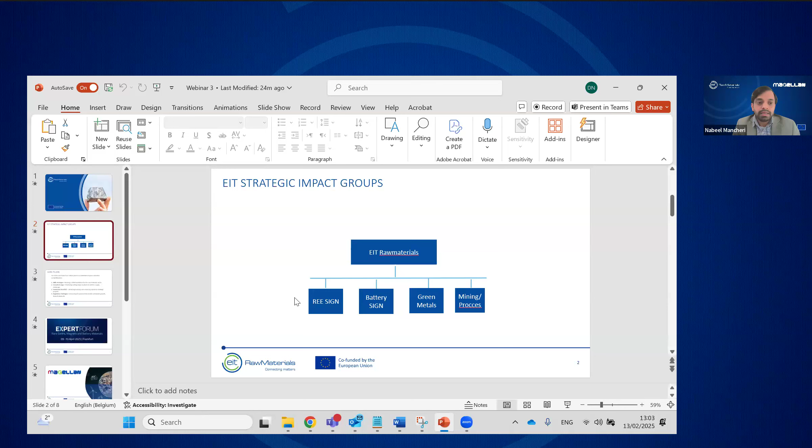But before I go to the webinar topic, I want to introduce you to something new that EIT is launching, which is very relevant to our sector, especially rare earths and magnets. EIT is going to soon launch four strategic impact groups, or networks, on rare earths and magnets, battery materials, green metals, and mining and processing technologies. These four strategic groups will tackle four critical pillars to accelerate European industrial competitiveness in sectors like skill shortage, innovation gap, investment shortfalls, and regulatory challenges.

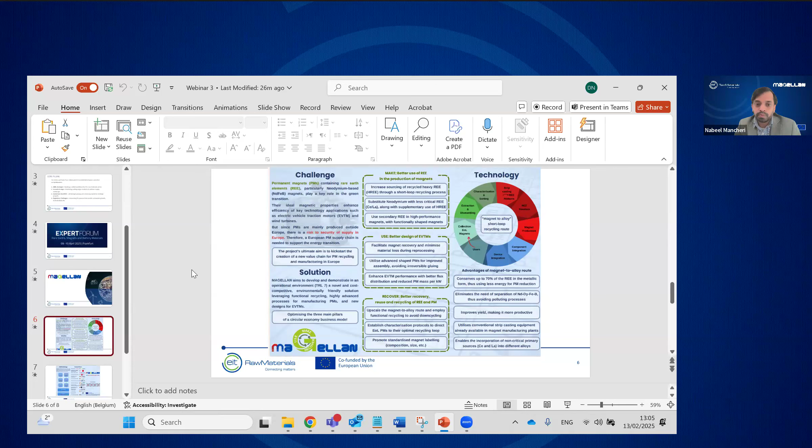Now I go to Magellan. Magellan is a European Horizon 2020 project coordinated by Orano, a well-known company in the rare earth field. The project's ultimate aim is to kickstart the creation of a new value chain for permanent magnet recycling and manufacturing in Europe. The solution is that Magellan aims to develop and demonstrate, in an operational environment at TRL 7, a novel, cost-competitive, environment-friendly solution leveraging functional recycling and highly advanced processes for manufacturing permanent magnets, as well as new designs for EV motors. Different work packages look into the whole value chain, with specific members looking at each part.

We have 14 consortium members from all over Europe, led by Orano, with EIT Raw Materials, CEA, and magnet companies like Magnet-T also part of the consortium.

This webinar is part of a series; we had the first and second ones in previous months, where we looked at different aspects of recycling permanent magnet issues. This webinar is also about recycling, but we will closely look at the economic and technological challenges, and also at what we usually call the short loop and long loop process routes for recycling permanent magnets.

So I have experts from companies well known in the industry and in our sector, and they will provide an update and discuss the issues.

The first speaker is Sorana Luca. She is from CEA, working on the Magellan project itself. She has several years of experience in the industry in the field of material science, synthesis, characterization, magnetic materials, semiconductors, and ceramics, etc. She did her PhD in material science in 2022 in France, in Grenoble. Her area of expertise includes experimental synthesis and characterization of rare earth intermetallic alloys and compounds, as well as recycling technologies by powder metallurgy.

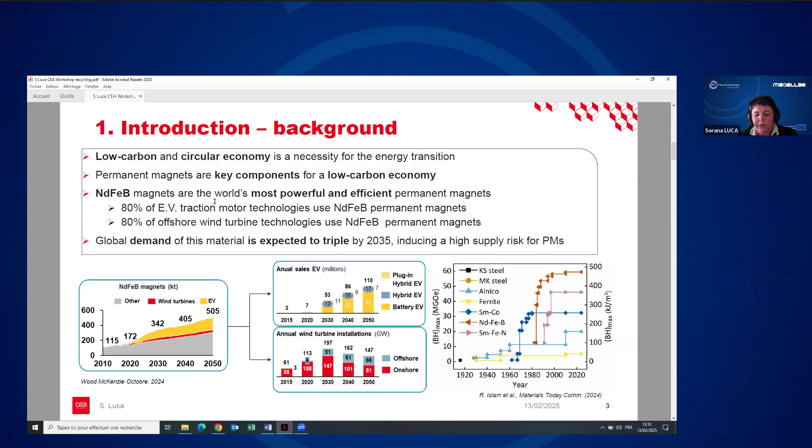Europe considers its external dependence on permanent magnets as critical because China dominates the entire value chain of permanent magnets, from the ores, the mineral extraction, the separation of the different rare earths, the metal conversion, the manufacturing of the alloys for permanent magnets, and manufacturing of the permanent magnets. Meantime, Europe imports almost all its needs in permanent magnets from China.

So a smart circular economy can meet the resilience challenges of the European energy transition. And we all know that permanent magnets are recyclable, and the recycling of this material becomes strategic.

There are several recycling strategies. We can recycle these magnets by a very short loop, if I can say, the direct reuse, which is the most energy efficient strategy for the recycling. But the system where the magnets will be reused should be compatible with the end-of-life magnets, and also we have to properly extract them from the end-of-life system.

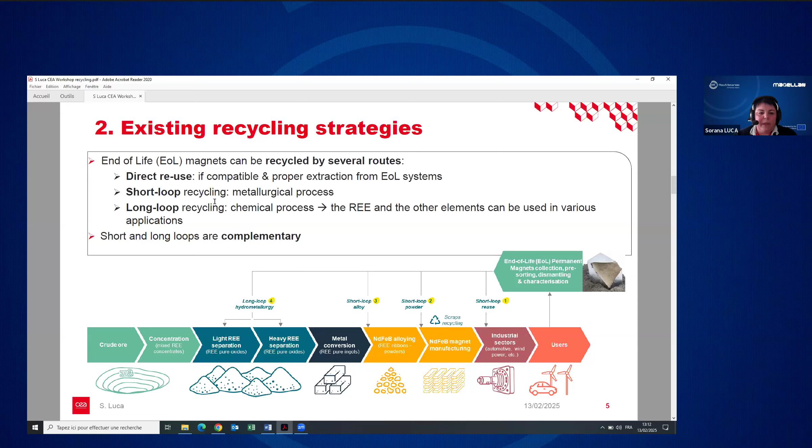In this context, we launch a research and development program together with Orano, which aims to industrialize and manufacture recycled permanent magnets, high performance magnets, which incorporate at least 25% of secondary raw materials in a short loop process.

The magnet recycling industry can capture growth opportunities in this strategic segment because the stock of used permanent magnets is building up with significant volume from the first series of clean technologies. And Europe recognizes the strategic nature of permanent magnets recycling within the Critical Raw Materials Act.

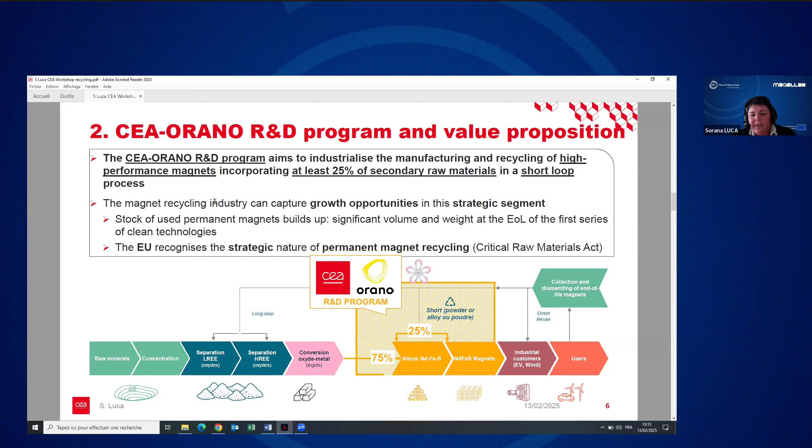Concerning the short loop recycling processes, scrap magnets can be introduced at different steps of the manufacturing of the magnets. High performance permanent magnets are manufactured by the conventional powder metallurgy route, which means that we fabricate an alloy by strip casting. This alloy is pulverized, the powder is compacted, then densified by sintering. An annealing heat treatment is applied to enhance the magnetic performances.

Then magnets are machined, coated, and included in a system where generally we magnetize the magnet. In the short loop recycling process, we introduce the scrap magnets at different steps. In the melting route, or magnet to alloy, the scrap magnets are introduced in the casting and alloying of the material, and in the powder route, we introduce the scrap magnets in the pulverization of the material.

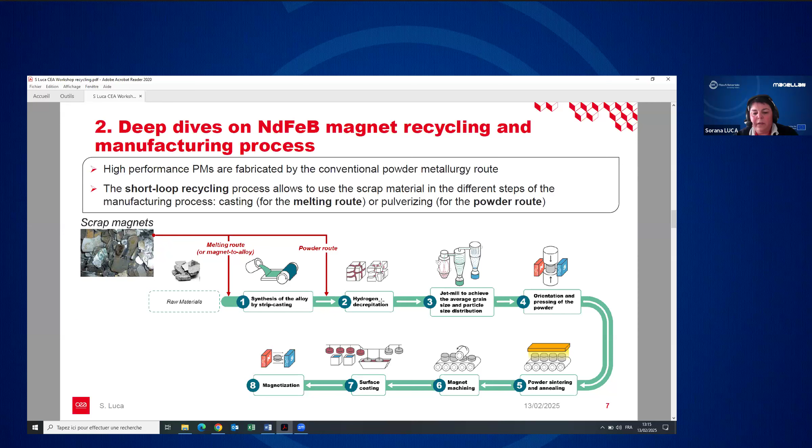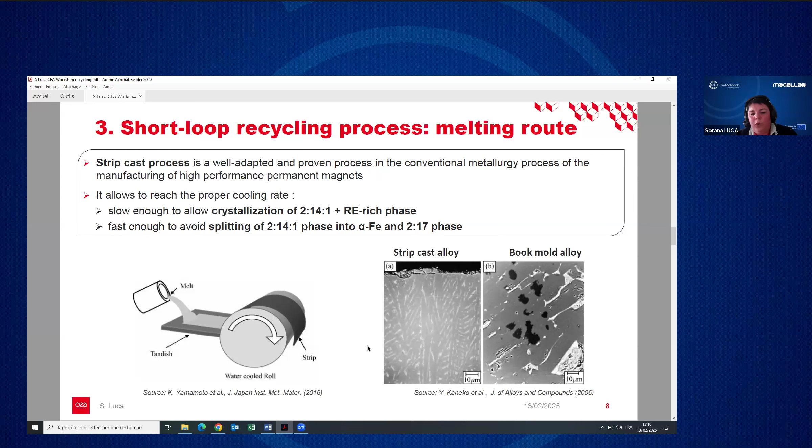Concerning the melting route, it is performed by strip cast process. The strip cast process is a well-adapted and proven technology in the conventional metallurgy process of manufacturing neodymium iron boron high-performance magnets. The raw material is induction melted. The melted alloy is poured on a copper water-cooled rotating wheel, and an alloy under the form of flakes of several hundred micrometers is obtained. These flakes have a particular microstructure which is very well adapted for the subsequent steps of the manufacturing process. Only the strip cast process allows us to obtain this particular microstructure.

So in the melting route, the scrap magnets can be used as raw materials to fabricate alloys and subsequently magnets. This route is particularly interesting in the case of heterogeneous batches of end-of-life magnets, especially those highly contaminated in oxygen and carbon, and allows us to avoid the conversion oxide to metal process. However, homogeneous batches highly contaminated in oxygen can also be recycled by this route. So this process is versatile.

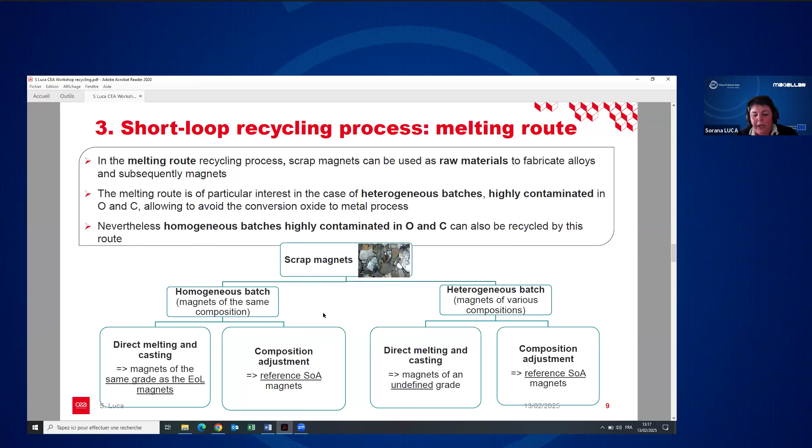Two kinds of scenarios can be seen and used for this recycling process, and I will show you later some examples of magnets recycled by these routes. Here you can see some pictures of the strip cast equipment which is installed in CEA-LITEN, which enables us to fabricate batches between 10 to 50 kilograms of alloy. Here we have the copper rotating roll, and here you can see the melted alloy which is poured on this copper rotating roll.

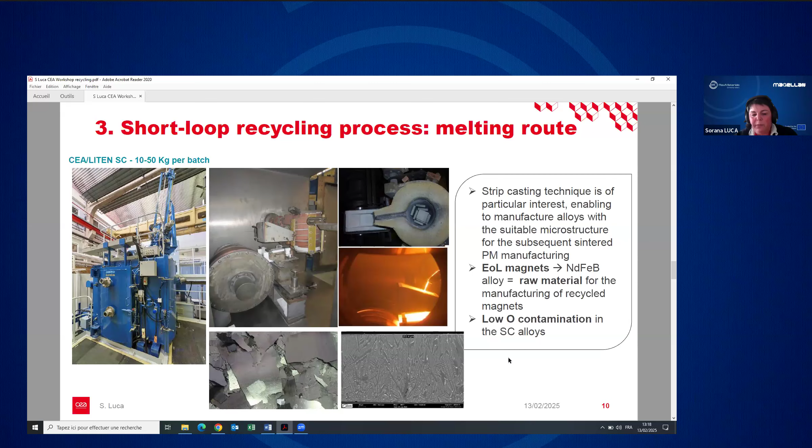You can see in this picture an example of recycled alloy in the form of flakes, with the particular microstructure formed by magnetic dendrites of the magnetic phase separated by a very thin rare earth rich phase. This particular microstructure is very useful for the next step of manufacturing by the powder metallurgy route of the magnets.

Here are some examples of recycled magnets, results obtained within different projects. In the first case, a homogeneous batch of end-of-life magnets coming from wind turbines was used to fabricate alloys and then magnets. We can see a very good recovery of the magnetic performances of the starting material, using only end-of-life magnets as the starting material. This project was financed by EIT Climate-KIC.

Another example is a heterogeneous batch of end-of-life magnets, where by a composition adjustment we can meet the reference N38 state-of-the-art material. These results were also obtained within an EIT Raw Materials financed project. What I did not say in the first case is that at the time of the project, the yield of the process was about 50%, but we have to know that oxidized material can enter a long loop recycling process.

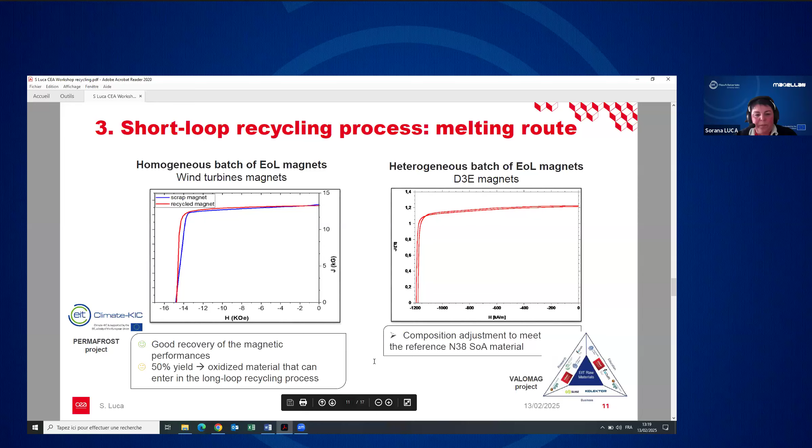The Magellan project, a Horizon Europe project, aims at developing and demonstrating in an operational environment a functional recycling route for permanent magnets, which feeds into the melting route for the recycling of permanent magnets. The recycled magnets are designed to meet the specification for electric vehicle traction motors.

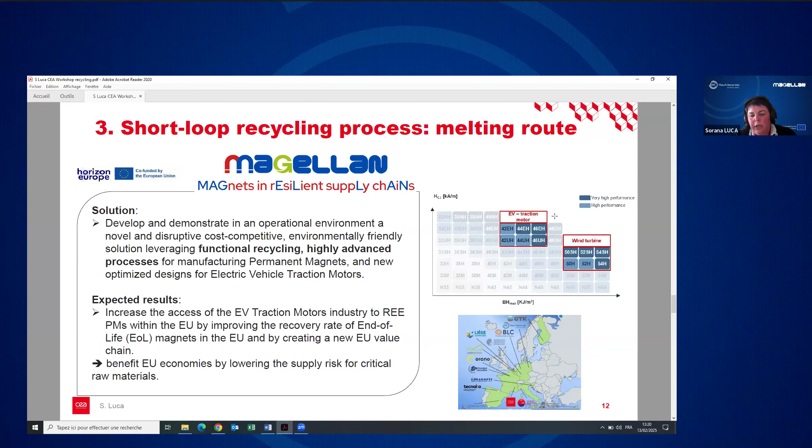If we talk now about the powder route, the scrap magnets will enter the step of pulverization during the conventional process to fabricate new magnets. The powder route is based on the reaction of neodymium iron boron alloy with hydrogen, and is particularly interesting from an environmental point of view.

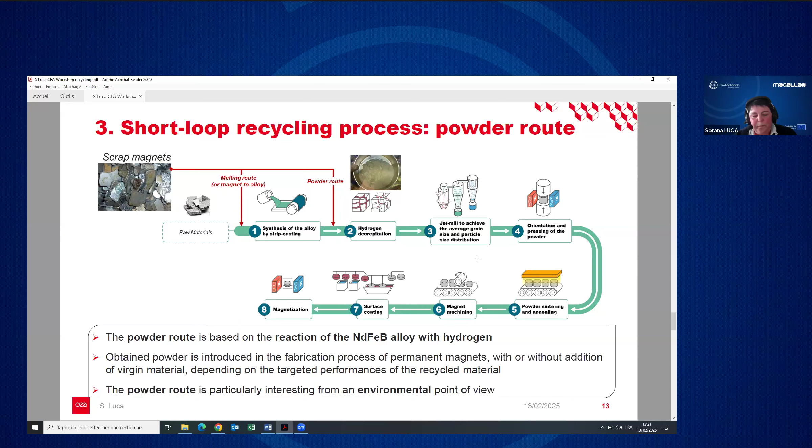The reaction of the neodymium iron boron alloy with hydrogen can be described here. We have scrap magnets with the microstructure of magnetic grains surrounded by non-magnetic rare earth rich phase. This alloy, these magnets, will react with hydrogen at ambient temperature, enabling pulverization of the material. This reaction is called hydrogen decrepitation.

These powders will have the same microstructure as the starting material. If we mill down this powder to fine grains, we can manufacture new magnets. Here are some examples of magnets manufactured with different loads of recycled powder, and we can see we obtain good magnetic properties by this process.

At higher temperature, under hydrogen above 600 degrees, the magnetic phase will disproportionate. However, this reaction is reversible, because under vacuum the neodymium, iron and iron boron will recombine to form submicronic grains inside a large particle. So this powder is coercive and can be used for bonded magnets. Here you can see the microstructure of a particle, with submicronic grains of neodymium-2-iron-14-boron inside.

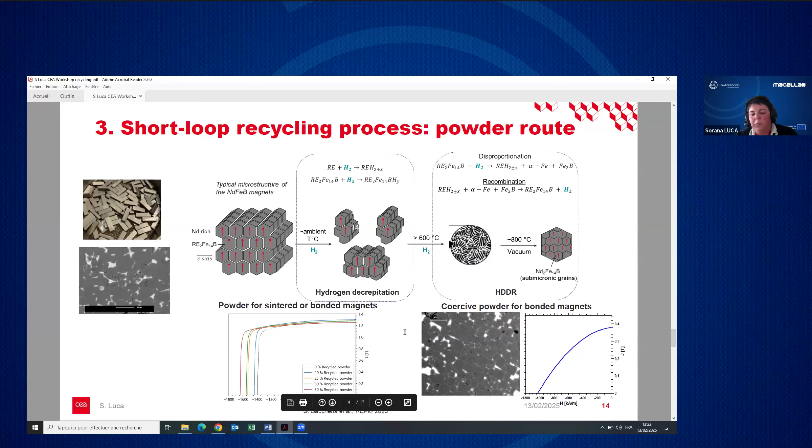In summary, the recycling of permanent magnets is possible, necessary, and strategic. The short loop and long loop recycling strategies are complementary, and each one is necessary. The short loop preserves value and strategic interests by producing magnets, and offers environmental benefits, reducing greenhouse gas emissions and water consumption.

I will finish my presentation by presenting our pilot line, which is under installation at CEA. This research and development program has a unique position to fabricate recycled magnets, which will incorporate at least 25% of secondary material from the short loop, with a target to meet the performances necessary for electric vehicles, so high performance magnets.

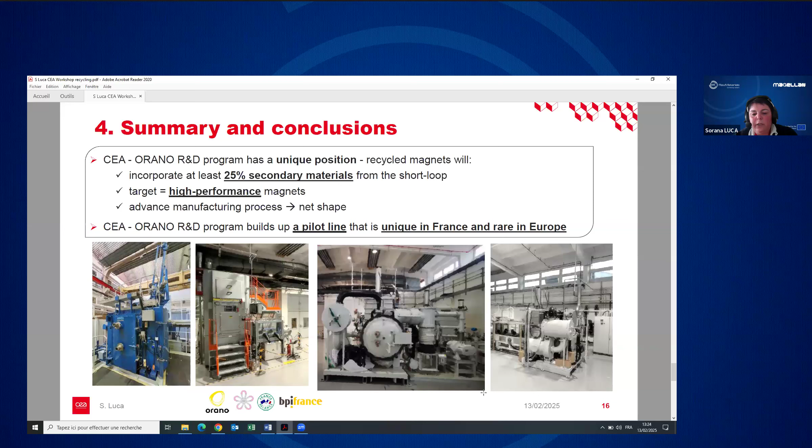We also work on advanced manufacturing processes to fabricate net shape magnets. This research program enabled us to build up the pilot line, which is unique in France and rare in Europe. Here are pictures of some equipment installed at CEA. Thank you for your attention.

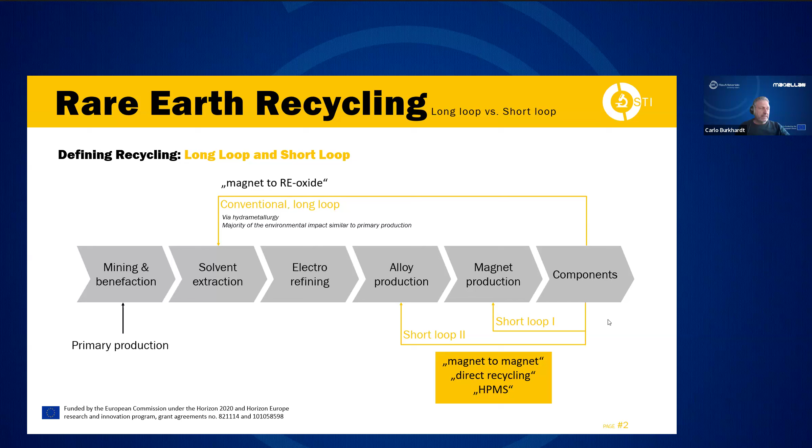I will look into the environmental aspect a bit later, and would like to start first with another topic, which I think is very important, because we just heard that recycling of magnets is possible. Yes, this is true. However, the recycling rate is still very low, and there are various reasons. First of all, end-of-life magnets are not all neodymium boron; the majority of it is ferrites.

There is also samarium cobalt, and even neodymium boron comes for recycling in two completely different states. One is polymer bonded, which is not so good to recycle - I'm not saying it's not possible, but it's probably commercially not very viable. And you have the sintered magnets, and of course that's for the moment the main target, how we can recycle sintered magnets.

So first of all, you have to distinguish what's in your component. And as I said, today we have no labeling, so it's quite difficult to find out what kind of magnets you have. I even had some recyclers that struggled, buying loudspeakers and thinking they have neodymium boron, and it was just ferrites, and they didn't make a profit out of it. The second big problem field is that currently we have no design for recycling - most of the magnets are deeply embedded, they're glued into the components.

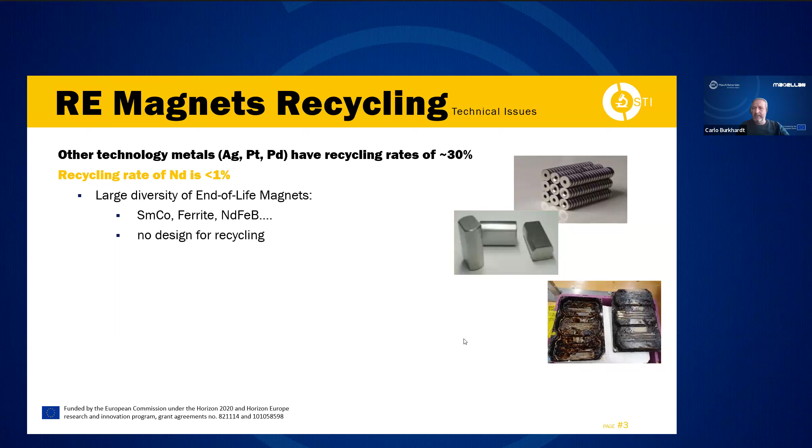They're coated with various coatings that are not so good for recycling. So that's a second problem field where one should look at. And the third one is that we have completely underdeveloped recycling schemes right now.

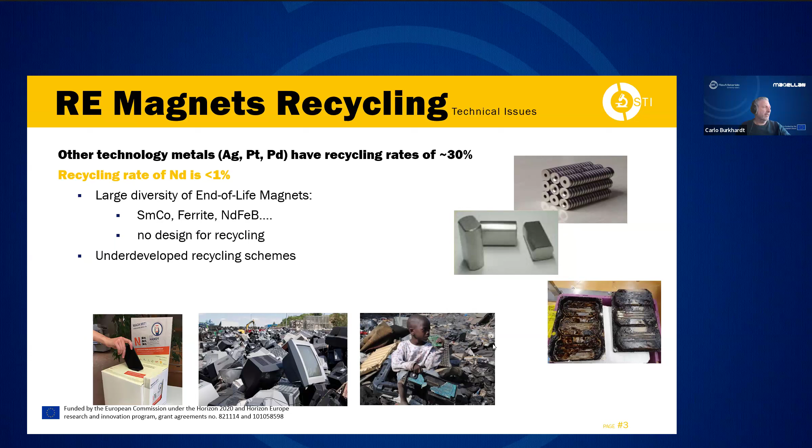There are a couple of placebo things, like you give back your smartphone. However, smartphone is probably one of the worst examples of how to recycle a magnet, because there are only a few grams in it, there are a lot of other materials in, but in the end, the material value is less than two euros. A lot of mixed scrap is ending in mixed deposits, and even a lot of it is exported. That's why I put this kind of provocative thing here.

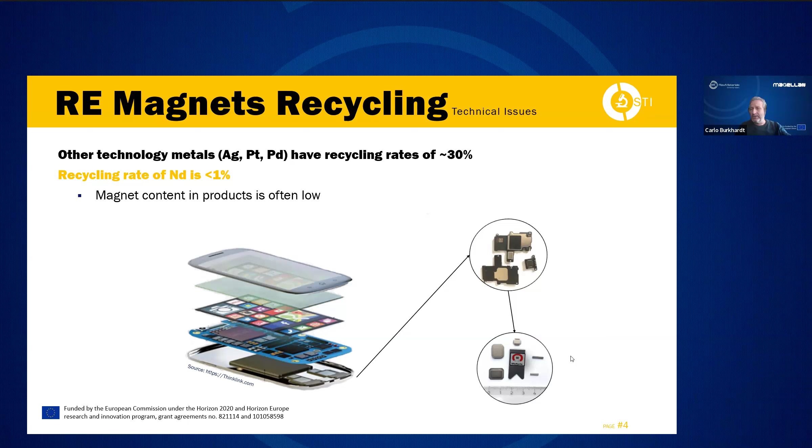As said already, the magnet content in the products is often very low. Neodymium boron magnets are fantastic because they have a high energy product because of their performance, but it means you need only very little in a lot of components. So in a smartphone, we're talking about 4 to 8 grams if it comes up to it, and very deeply embedded, so you wouldn't recycle a smartphone just because of that.

The next thing that's causing a lot of issues is that the current shredder processes, which are used for a lot of recycling operations, are not suitable for recycling neodymium boron under various aspects. First of all, the magnets agglomerate, and this is also hated by the recyclers because it leads to downtime and increased wear of the shredding plates. It's very difficult, if you look here on the left side on this hard disk drive scrap, to recycle something where the magnet is finely dispersed.

And obviously, because of their hardness, they're brittle, they're breaking and they're agglomerating. If you walk through recycling sites, you see a lot of spaces where a lot of magnetic scrap is agglomerated. Really, recyclers to date are not particularly fond of magnets.

This shredding procedure, of course, is changing, because in most cases where you have a neodymium iron boron magnet and the motor, you also have a battery pack. These battery packs don't like to be recycled because of the oxidation. They can combust instantaneously, and there are a lot of fires all over Europe in recycling sites because of that. So more care is taken to separate things, and that's, of course, good news for magnets.

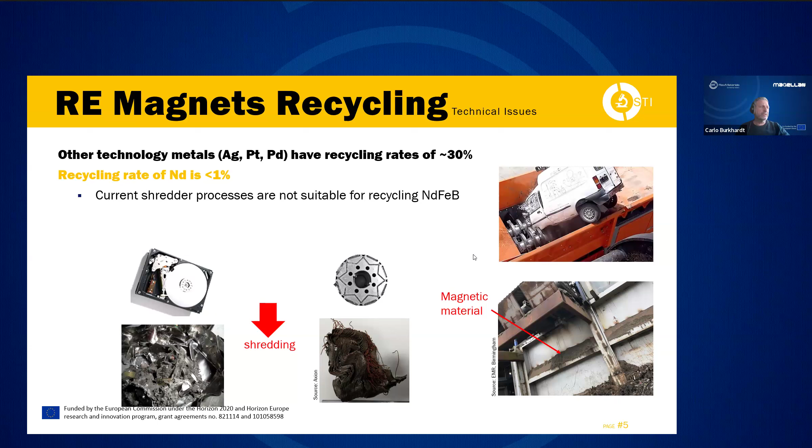What we did in the SUSMAGPRO and REEsilience project, we dismantled a lot of components where we could get hands-on just to see what kind of magnets are in. And we classified these products, first of all, for accessibility.

That's a very important thing, because if you look, for example, into the steering motor, in the upper left-hand corner, this has a material value of magnets of about 14 euros with current prices, but you need about one hour to access it, which in most European countries is about 40 euros. So this is not a business case. Accessibility — how fast you can get it out and how high is the effort to liberate the magnet from the component — is essential for magnets recycling.

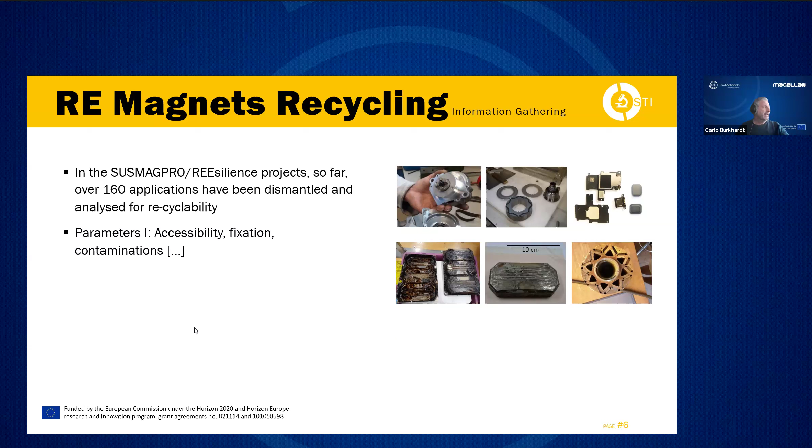Second is fixation: how are they glued, can you easily demagnetize the material, how embedded is it, what kind of contaminations do you have. It's not only the glues, it can be spray paint, it could be polymer coatings. And the second set of parameters that we looked at are the magnetic properties: what kind of magnetic grades are in the respective components.

We set up a comprehensive database, and we use this database for two reasons. One is input for automatic disassembly and labeling, because for me that's the key for magnets recycling to make it commercially viable. The second is input for design for recycling, so in future we avoid a couple of mistakes that cause us now trouble with automatic recycling.

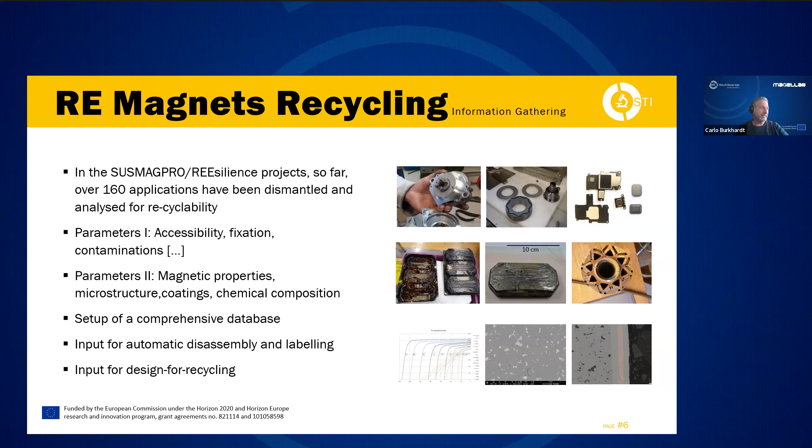In the next step, we looked into the major value streams that are now in magnets, and one of them is hard disk drives. A lot of people look at you a bit strangely and say, well, my laptop has an SSD. Of course, the consumer market is not the target, and here also the statistics lie, because they look only at the consumer market. But we have billions, literally billions, of hard disk drives that are in server farms in the data centers, and with AI this will increase again massively.

So what we've developed in SUSMAGPRO was first, and that's a typical university project, the robot was for free.

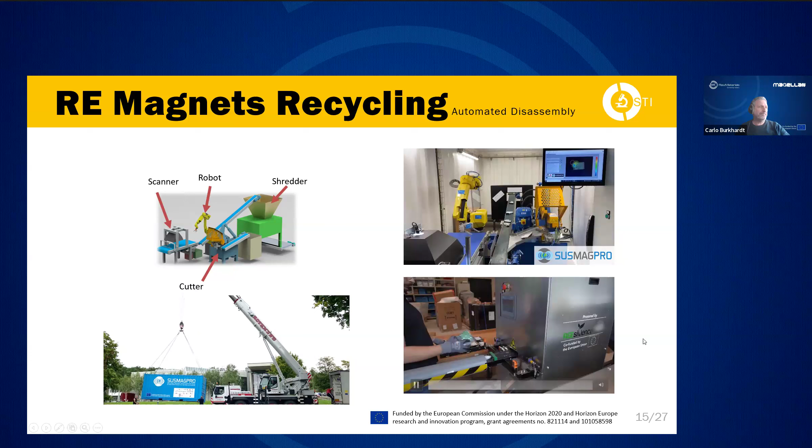Another value stream we looked into is flat screen TVs. Flat screen TVs would have a magnetic content that's not viable for recycling, but you have to open them anyway to get out the TFT screens because of the mercury. Once they're open, you can easily extract the loudspeakers that contain the magnets. Here we have ferrites and neodymium iron boron, currently about 50-50 ratio. The flatter it is, the more neodymium iron boron will be in, increasing with time. So this is a very simple separation mechanism that detects via visual control and some sensors what is neodymium iron boron and what is ferrite magnet, separates it, and then it can go into recycling.

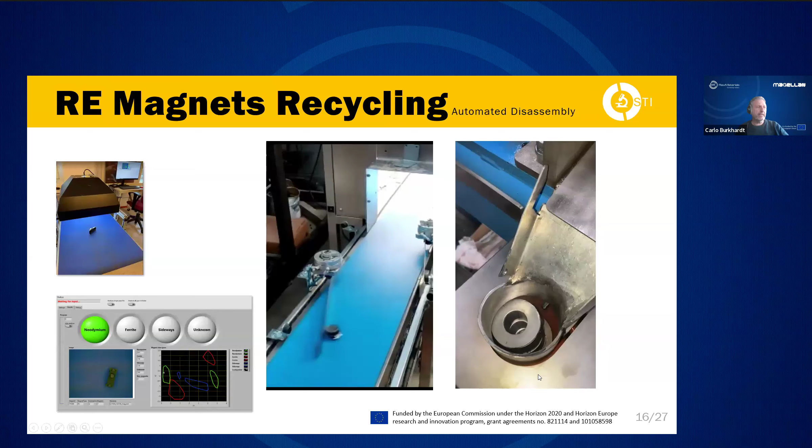A third thing we're working on is motors with embedded magnets. You see here a machine that presses out the shafts. That's then doing a heat treatment of the rotor that's falling down, and then separating the magnets from the electrosheets.

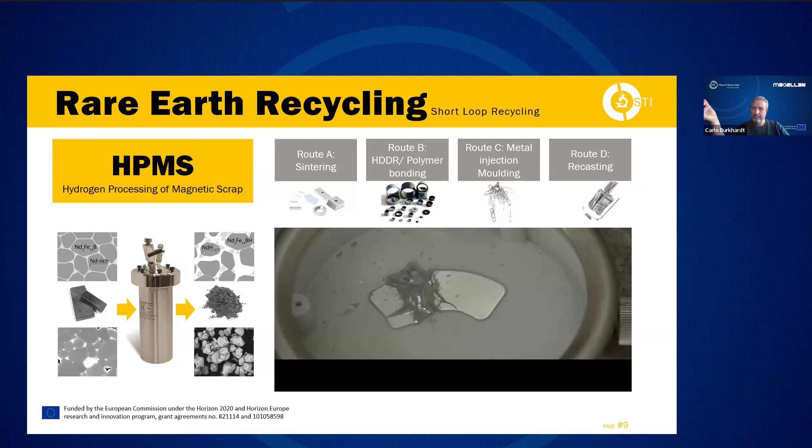All these things are IP protected, as is this hydrogen processing of magnetic scrap that Sorana showed before, which is when you introduce hydrogen into the system. The beauty of it is that it works not only for magnets but for deeply embedded components. So you can put the corner we chopped off from the hard disk drive into the reactor, tumble it, and during the hydrogenation, which you see in this video, the material is not only forming a powder, it's also demagnetizing. By tumbling even complete rotors or corners of hard disk drives or parts of loudspeakers, you can separate the magnetic material, making it a very cheap liberation mechanism.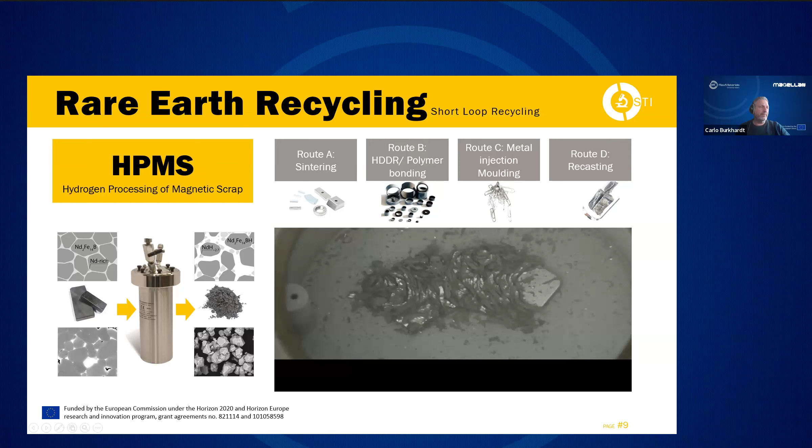That's why we think this has a very high potential. Again, this is IP protected, in this case by the University of Birmingham.

Then, if you have the powder, ideally you can compact it in a field, sinter, heat treat, shape, and coat it, mirroring how you sinter magnet from virgin material. That also makes it very simple to blend recycled material into new material using the same processes. I should have probably added here the powder treatment—that means jet milling. You have to jet mill the material, and during the jet mill you can also take out impurities that haven't been filtered before with sieving.

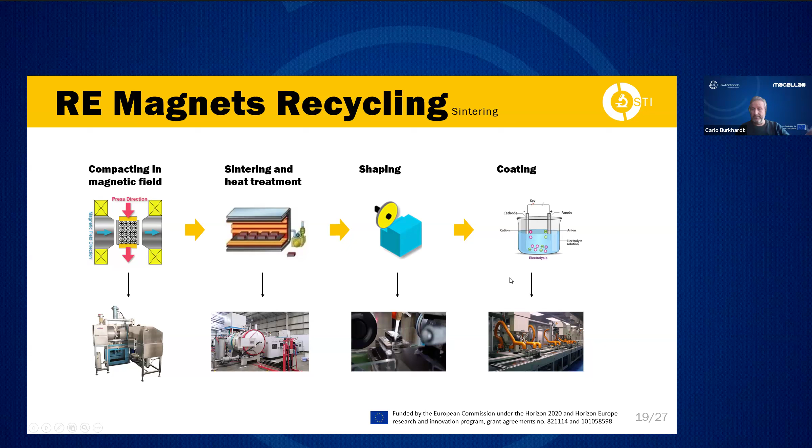I personally see the future of the short loop either in the middle range. There are a lot of magnets in the middle range, let's say between N35M and N40SH, where you easily can use recycled material if available, not necessarily pushing the boundaries to very high performance grades like N50, N52 with 100% recycled material. In future, we will see blends that can take as much recycled material as possible, and that's one major focus of the Resilience project—to test the boundaries of how much virgin and recycled material can be alloyed to get stable production of this kind of properties.

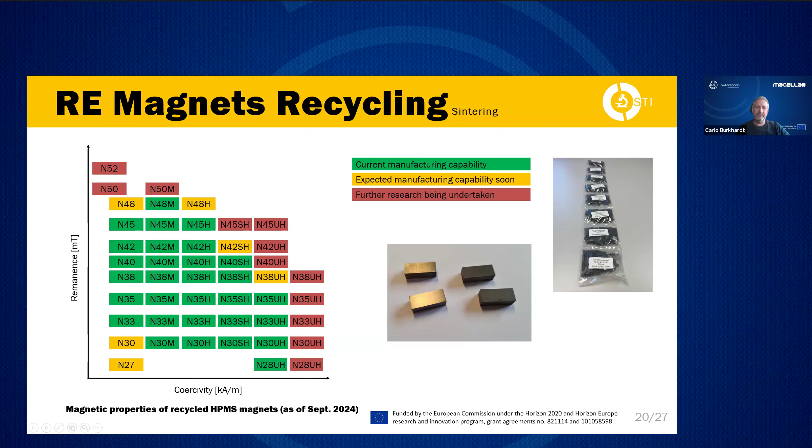If you look at the CO2 equivalent, what we've done here—and this was done by Enzo Granello, who is also in the call—he compared the LCAs and TEAs that we made in the projects with short loop recycling against literature, meaning LCAs of primary and secondary material. What you see here is a range, and it's surprisingly large for primary material, between 21 and 89 kilograms CO2 equivalent per kilogram block of magnet.

For secondary material, there are several routes, say hydrometallurgy, pyrometallurgy. Reuse, of course, when you can reuse the magnet, that's environmentally the best. But you see that short loop recycling is also very close to the reuse scenario, between 1.2 and 6.9 kilogram of CO2 per kilogram block of magnet.

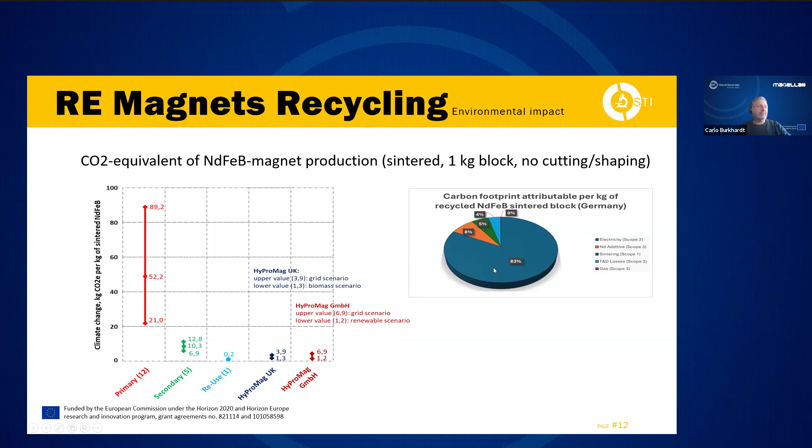The differences are coming from the electric grid. Short loop recycling is very much dominated by the consumption of electricity. For example, 6.9 in Germany means you use a mixed electricity grid which includes some coal. In the UK that's better because they have nuclear energy. And the 1.2, respectively 1.3, is where you use 100% renewable energy coming from wind and solar. So electricity is a driving factor here.

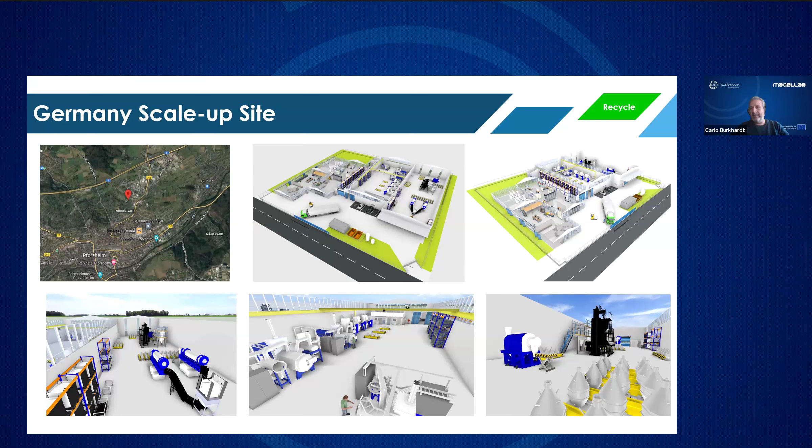Now a bit of an outlook, and I've chosen here the German site—the UK site is 6 months advanced, but this is what we're currently installing in Germany. This is a plant that initially will be capable of processing around 100 tons of recycled material into sintered magnets. In a second phase, already planned, we will go up to 500 tons. The sister plant, being 6 months ahead, will be installed in Tyseley in the UK, and another one with a capacity of 1,000 tons will be installed a year later in the US.

And that brings me to the end. The conclusion is: short loop recycling, from the scientific point of view, I think is nearly at TRL 9—we're scaling up. The difficulties are in liberating the scrap. Here HPMS can be helpful, and it can also be helpful to feed some of the powder into the long loop. But a couple of things still remain to be solved in the next couple of months and years. I'm open for your questions.

Thanks, Carlo. Very interesting and detailed analysis of the short loop process, HPMS especially. Before we move to the next speaker, we have a couple of questions, both relevant to you, Carlo and Sorana.

Maybe for other participants we can ask that question now. So the first question is—and you can both answer since you may deal with it differently—what happens with the metals from the magnet coatings in the melting route? That's the first question, maybe you can answer, then I'll take the second one. It could also be relevant to Patrick in the next presentation, which I'll ask later, since there are three different routes. Go ahead, Carlo.

Cyclic Materials is focused on producing a number of different metals for the energy transition, and the headline metals are the rare earth elements. We think we have the only scalable process for processing a wide variety of post-consumer recycling devices in local countries, without having to use low-cost labor. We're currently operating at commercial demonstration scale and shipping product to our next speaker, Solvay, every quarter. Our goal eventually is to produce enough rare earth element raw material that, if dedicated 100% to EV motors like Tesla motors, we'd be enabling the production of about 6 million additional motors per year.

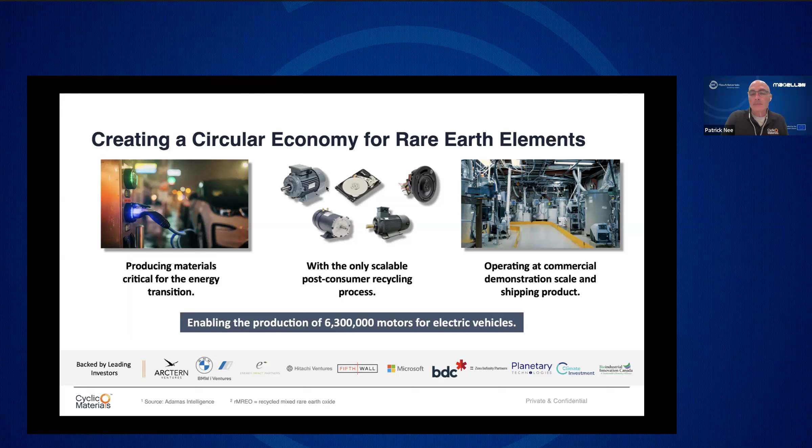I won't go over this too much, everybody's heard this three times already today. Magnets are made out of these rare earth elements. They're critical, they go into motors and a few other applications, which then enable trillions of dollars of applications downstream, from vehicles to data centers to robots to consumer electronics, etc. Really critical materials for our material world.

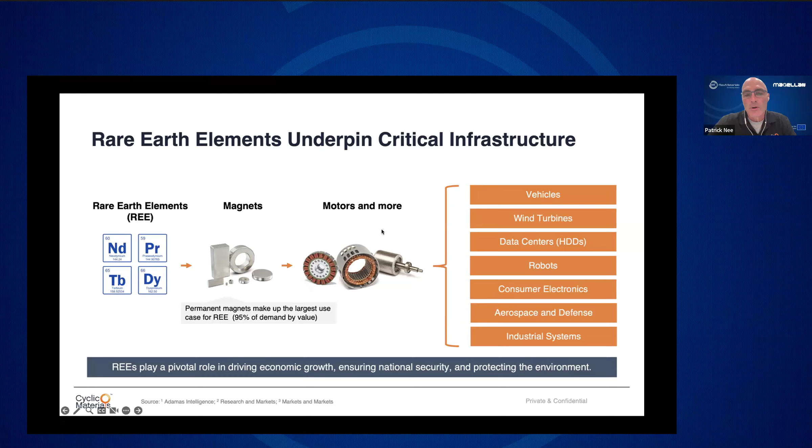We've already talked about the challenges with our ambitions for automobile electrification, wind turbines, and upcoming robots. There's growth in demand for these materials, and nobody wants a new mine in their backyard. So primary production is having difficulty keeping up, and there's a projected shortage coming. There's a second challenge we've mentioned as well: most of these materials come from China, and many governments and industries are nervous about having their supply chain centered on this geopolitically sensitive area. We believe that recycling of all types, short loop and long loop, can be a pressure relief to these challenges. But as we've heard, only about 1% of these magnets are recycled today, for a very intuitive reason we've already talked about: magnets stick to steel, and so they follow the steel into a steel refinery during any recycling process that exists today. Our goal is to raise that up to the 30-40% level.

Why do we think that's achievable? Most other metals are recycled somewhere in that 30-40, sometimes even 50% level. That's true for the base metals we all think about, aluminum, steel, and copper, that even my mother could name, as well as niche metals, vanadium and germanium hit these numbers as well. There's no reason that we as an industry, short loop and long loop, can't hit that 20, 30, 40% recycling rates for rare earths as well.

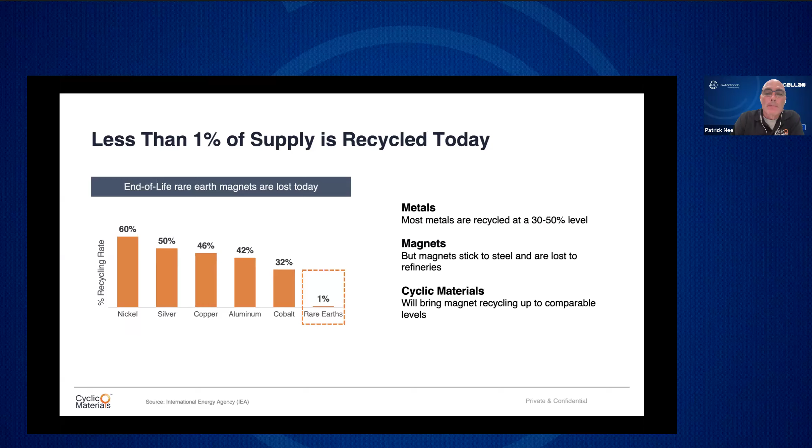And as Carla was saying, these come in all different shapes and sizes, and even different types of magnets in them. Not only different grades, but the range of ferrite, neodymium iron boron, samarium cobalt, and alnico. So we've focused on building a process that can take about 95% of all these feedstock types through the same process. It's true if we ever get a General Electric 15 megawatt wind turbine, that's just too large. We can't get that in. But our goal has been to build a process that doesn't need to differentiate between the different feedstock types.

You take those devices, and the first step is, how do you get the magnet out? We're doing that in a way that also produces—because if you get a Tesla motor, you not only get the magnet, a device with magnets in it, but you also get copper, aluminum, and steel. So our process for getting the magnet out also allows us to separate copper, aluminum, and steel, and those get sold into the local scrap market.

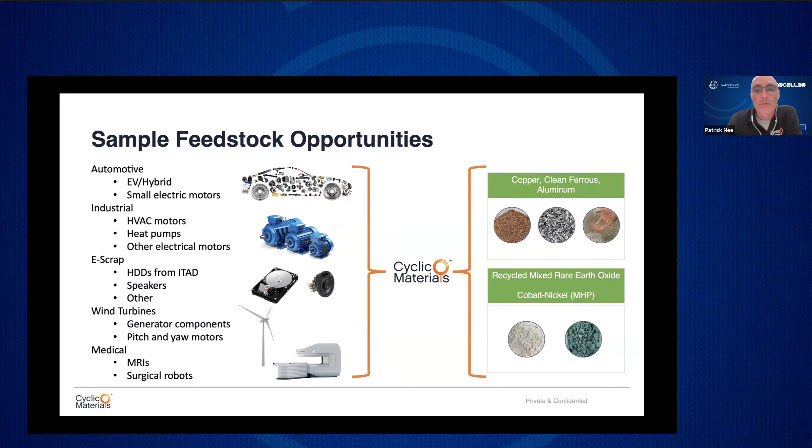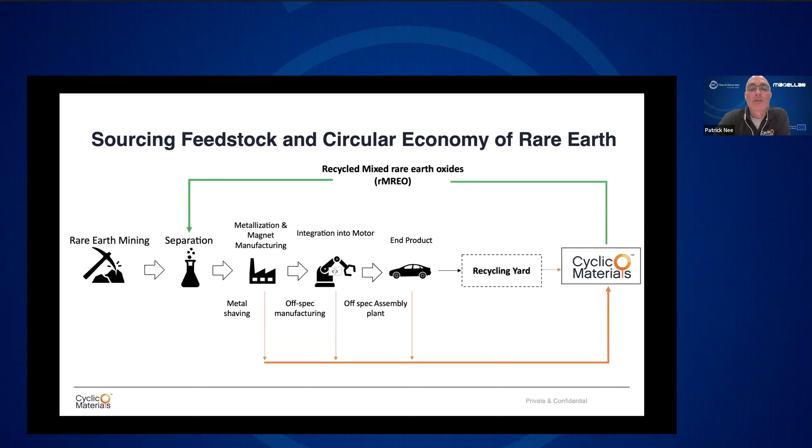We're operating at commercial demonstration scale. We have a plant for that separation of magnets that can operate up to 8,000 tons a year. We have a hub that is shipping each quarter. It can process 100 tons per year right now. We are building the next scale up of both of these plants in North America, and we are doing site selection for a European plant as well.

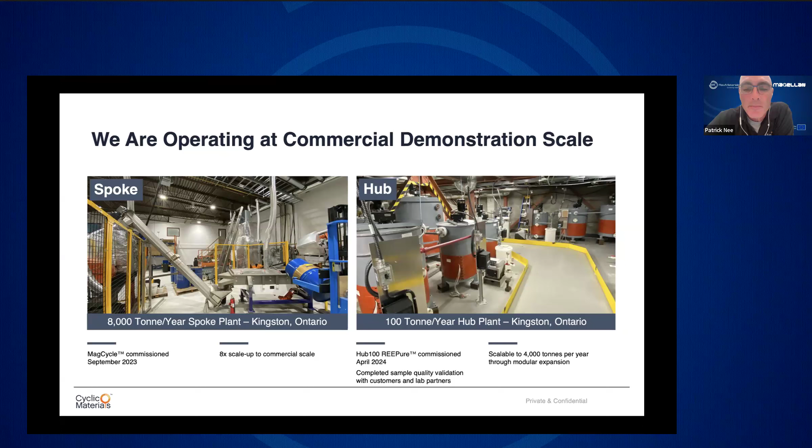ESG-wise, we have done an ISO certified LCA. We did our comparison against primary material. We didn't have enough data to compare this to a short loop, but it would be great at some point to do that comparison. Using primary material as our benchmark, there's almost a two-thirds reduction in CO2, and a 95% reduction in water usage.

Of course, we're not disturbing anybody's backyard. We're not building a mine in an underdeveloped country, so there's a social impact. In terms of governance of supply chains for large industry, we are a secure and domestic source for these materials. We do provide material traceability and reporting of the recycling for those of us who are providing feedstock.

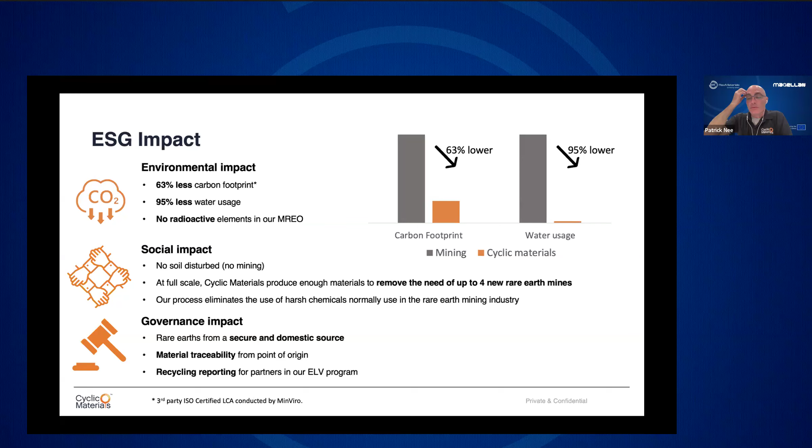In terms of some of the challenges we deal with, we've touched on a couple of them, but that diversity of feedstock and being able to handle both different magnet types, because at scale, we believe you can't sort effectively at large scale when devices are coming from end of life. Not even if they were ever well labeled, you can't read most of the labeling any longer.

One of the big challenges right now, and although I think Carlos did mention this, one of the other big competitors for that feedstock—and it's really, to be honest, the best for society—is complete reuse of the device, not reuse of the magnet, but reuse of the device. My Tesla battery is dead, or I crashed the Tesla, but the motors are still good. That should go back to reuse, to some Tesla owner that has a damaged motor. That does make acquiring feedstock harder; that is one of the competitors for feedstock.

Second is that it goes abroad. Carlos also had an image showing that collection schemes of devices mean a lot of devices go abroad. They are competing for those other base metal values, which is why we have to recover those metals as well. And then, as we sell our products, that supply chain in Europe and North America is still weak, so it's hard to find that entire chain of partners with whom to partner to get the material back into a European automobile maker or a North American automobile maker.

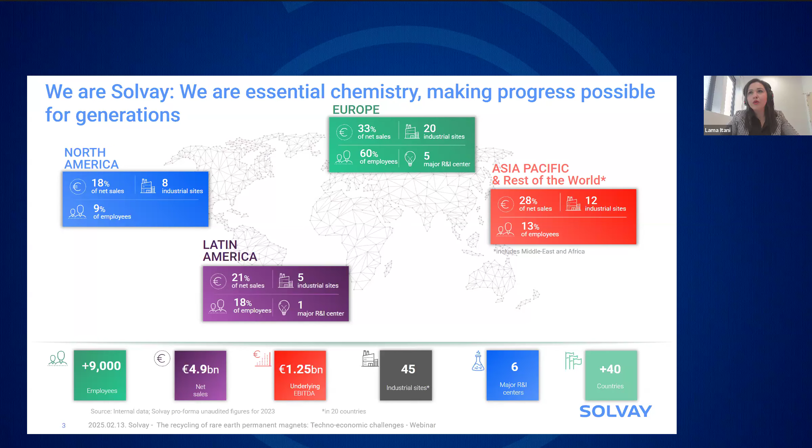Just before going deeply into the topic, a few words about Solvay. We are a chemical company with 9,000 employees, 45 industrial sites, and 6 major research centers spread in a balanced way across North America, Latin America, Europe, and Asia. A chemical company delivering essential chemical products: soda ash, carbonate, peroxides, silica, and of course rare earth materials used in our daily essential applications. I can mention air and water purification, agro, health and well-being, industrial applications, etc.

So if we look at the rare earth business at Solvay, it started in 1948 with La Société des Terres Rares, and if we look at the separation processes that will be the topic of today, they started in 1956. Over 75 years and across 5 different groups, like Pechiney, Rhône-Poulenc, Rhodia, Solvay, and recently the new Solvay, this business did not stop evolving and changing itself, proposing new products and new processes.

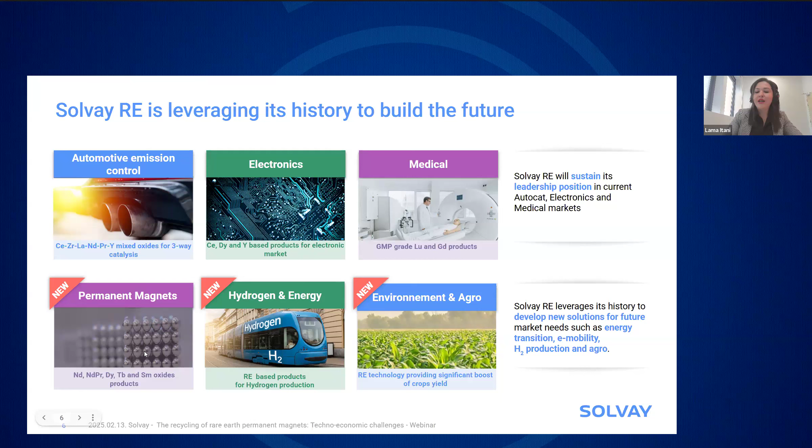In order to be aligned with market changes and market needs, the new strategy of Solvay leverages this history, know-how and competence to maintain our leadership position in current markets like automotive, emission control, electronics, and medical, but also to enter new markets with strategic ambitions like e-mobility, energy transition, hydrogen, and agro markets, and of course EVs and wind turbines. This is the permanent magnet market, where I will be focusing the rest of the presentation.

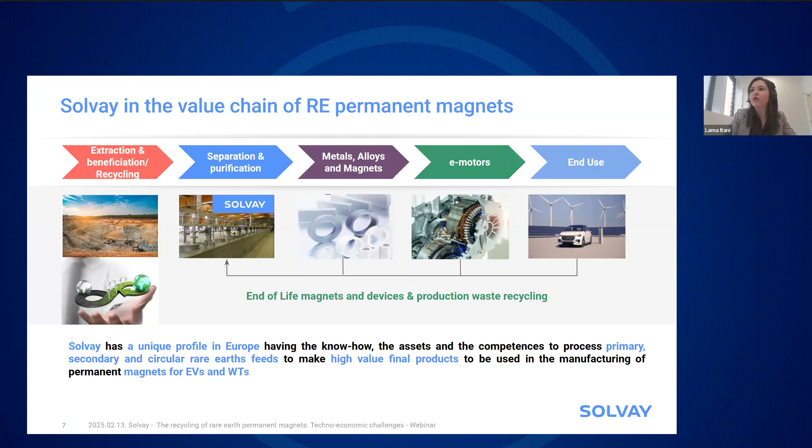So where are we in the value chain? Solvay is, and will be, a rare earth oxide provider. We are in the middle of the value chain, and our ambition is to contribute to the development of the supply chain of rare earths in Europe. We are reinventing our process and our assets to be able to accept large types of rare earth feeds, dealing with feeds from mines outside China, from tailings, and also from end-of-life magnet recycling. Our strategy is to combine both the virgin and recycling supply chains to serve permanent magnet e-motor producers and OEMs for EV and wind turbine end markets. This combination is important, I will talk about that later.

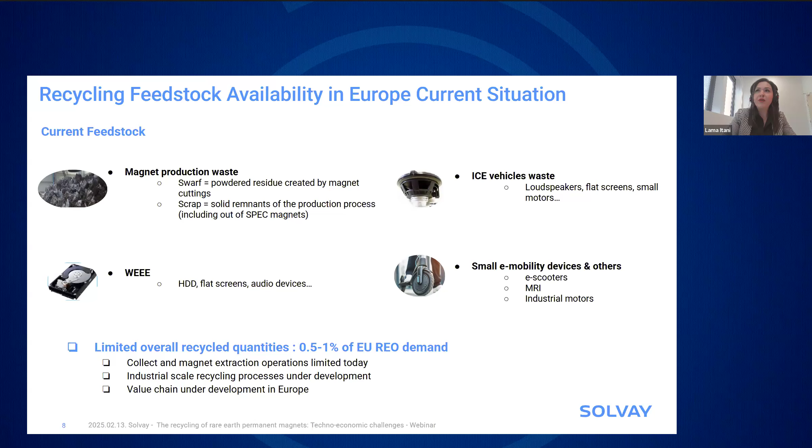Maybe what I can add to what has been said is that today the overall recycled quantity in Europe is limited to about 0.5 to 1%, as also said by Patrick. It is limited because everything is in progress, the whole value chain is under development in Europe, from collection to new magnets. This is the right time to develop all these processes and to be ready for the future, because in the future this recycling feedstock or inflow will increase.

It will be mainly driven by the increase of end-of-life EVs. We took some assumptions to make these estimations: 12 years as a mean EV lifetime, 25 to 30 years for wind turbine lifetime, and a ratio higher than 80% for collection and recycling levels. This is also an important criteria that will impact the estimation.

With that, we see that the inflow coming from EVs and wind turbines will start in 2035. So it is soon, and it could cover up to 10% of European demand. A significant increase could be expected for 2040 and 2050, where it can cover up to 20 to 50% of European demand - very significant. Of course, it is not the whole demand, so in the meantime, and maybe for the future, a combination of the two supply chains, virgin and recycling, should coexist to serve the whole demand and move towards real European sovereignty.

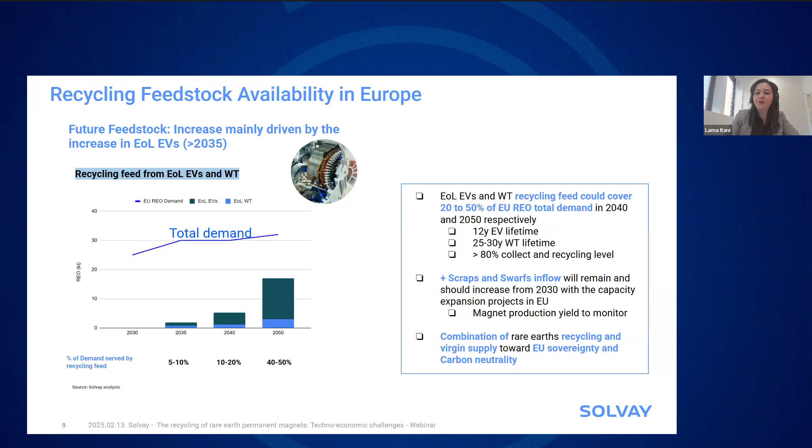I can go quickly on this slide because it's still general and we've heard many things. There are 3 ways to bring back recycling feeds into the value chain. Short loop recycling has been brilliantly explained by Carlo and Sorana, so I'll skip that. Let me mention reuse, because it's also another option, even if limited. It's limited because the end-of-life magnet is injected directly into a new application - either a less demanding application, or especially one where the specification or performance of the magnet isn't changing, which is not the case for EVs, for example, or wind turbines.

And then I will focus on long loop recycling, where the end-of-life magnets will go back to a leaching step before rare earth separation and purification to make completely new rare earth oxide raw materials.

But whatever the route selected for the recycling of end-of-life magnets, collecting, dismantling, sorting, extraction of the magnet, and demagnetization will be a common challenge, and should be developed in parallel in a competitive way, with some incentives and regulations regarding waste management and how the flow of this waste should be handled within Europe. So this is a point of attention for the development of whatever is the recycling loop.

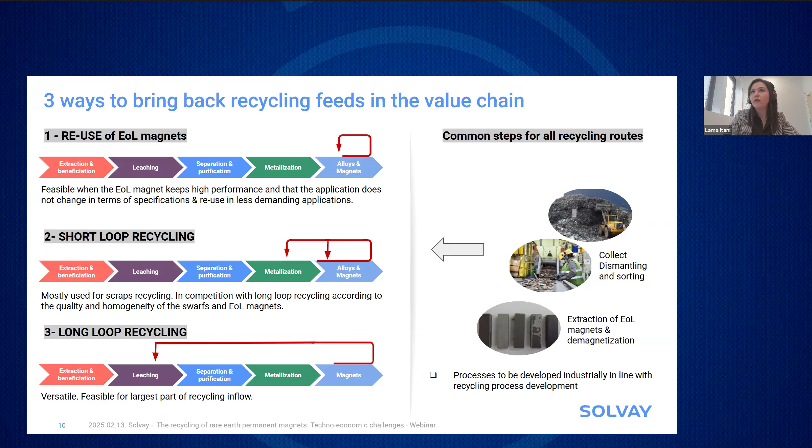Okay, I know you're tired. This is my longest slide, so try to stay with me.

For the long loop recycling, we said that the magnet powder, after collection, dismantling, and making the magnet powder or swarf, will go into a leaching step. So this is what we call hydrometallurgy, the step.

This part of the process, from collection up to the production of a mixture of rare earths free of iron and boron and free of many impurities by successive selective dissolution and precipitation steps, is led by Solvay's supplier, and we were very happy to announce the collaboration we have with Cyclic on that and on this supply.

So, Patrick, sorry, I resumed all the process in a very small box, but there is a lot of know-how, process complexity, and chemistry behind.

So Solvay will focus on what we know to do since 70 years, which is rare earth separation. We get the mixture of rare earths depending on the composition of the rare earth salt, could be carbonate, oxide, etc. Depending on the level of impurity and the composition, a pre-treatment step could be applied before entering the separation process or the separation equipment.

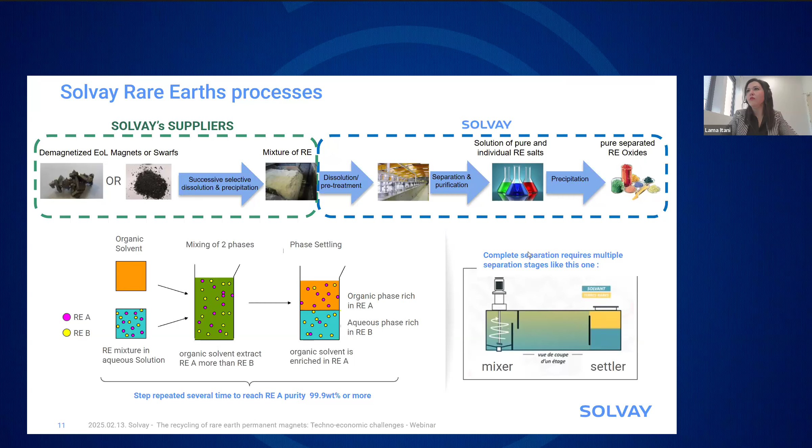I tried to compare in an easy way the short loop and the long loop. This comparison is showing that the two processes, or the two recycling loops, are complementary solutions that should coexist toward a sustainable supply of rare earths in Europe.

The long loop recycling will be preferred regarding the heterogeneity, the level of oxidation, the level of impurities, and the variation in the composition of the feed, and it also guarantees the highest performance of the magnet, because we go back to completely new rare earth material oxide, raw material. So these are the two differentiating points for the long loop.

On the other side, the short loop will be differentiated by the fact that it will have less environmental impact, because by definition it has less process steps and also less quantities of reactants and water to be consumed.

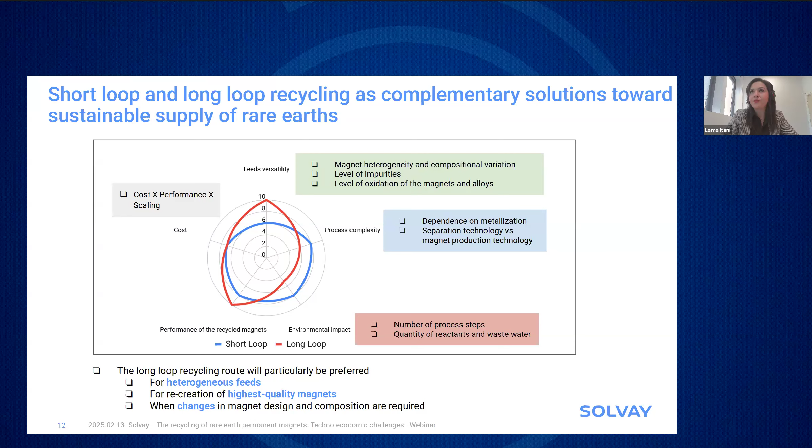For the conclusions, we all agree that recycling of magnets will contribute or provide security of supply of rare earth for Europe. It gives us access to both light rare earth elements and heavy rare earth elements, contributes to the preservation of natural resources, improvement of environmental footprint, and will help the development of circular economy in this field.

However, to reach that, we still have to go through a few challenges. We talked about feed availability, and also about the development of industrial scale processes going from collection to magnet production in a cost competitive way, and in a way where end users are willing to pay for the development of this chain.

Enablers - I think I'm repeating what was said by Carlo, Patrick, and Sorana. Partnership is important. You saw the complexity of the value chain, the complexity of each process at each step of the value chain, so it is not possible other way than partnering across the whole value chain.